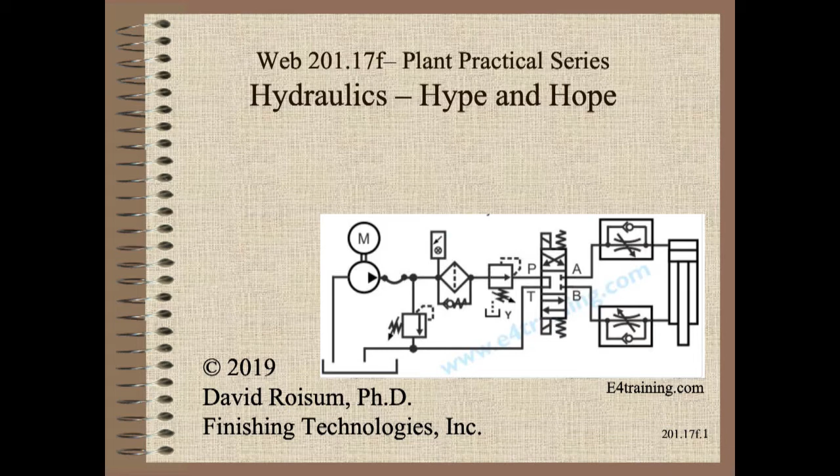While hydraulics are not for everybody, they do have many advantages over pneumatics. Even if you do not use hydraulics, you will learn useful best practices that apply to both fluid control methods in this short clip.

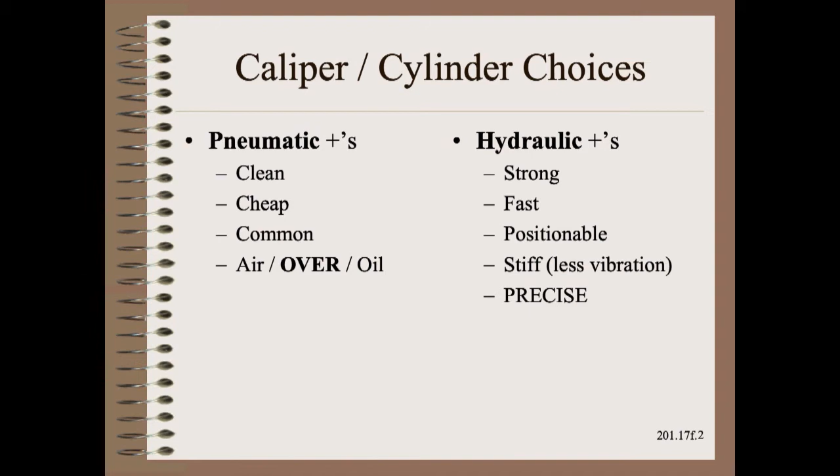Pneumatics are clean and cheap, and for those reasons more common. Yet, hydraulics offers many advantages. They are strong, fast, positionable, stiff, and most important for web handling, precise.

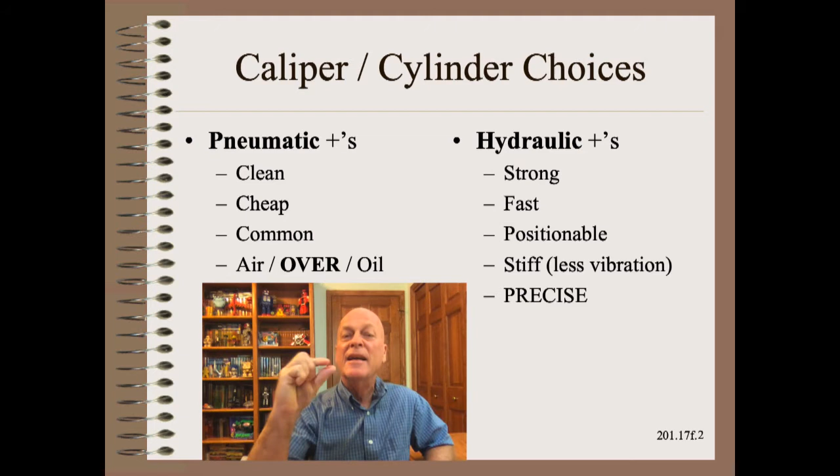What many people do not know, however, is that you can get some of these benefits by going air over oil. This is a simple rebuild that preserves the simplicity and investment in your pneumatic piping, yet can provide the muscle and vibration reduction of hydraulics.

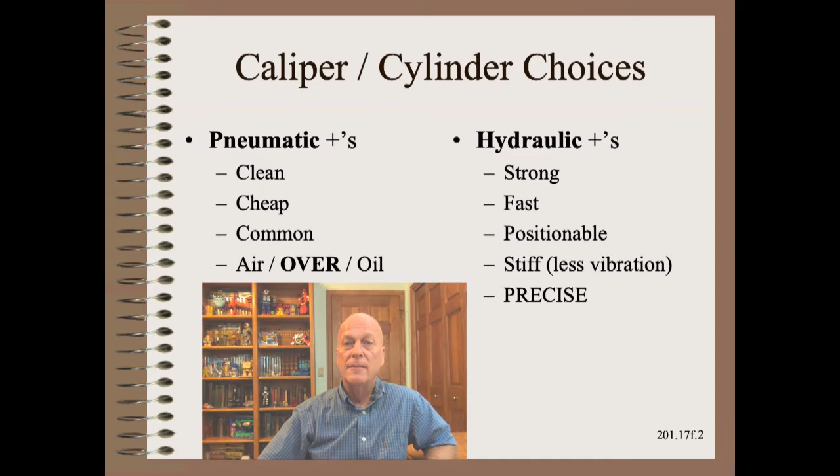Question: what is the definition of a seal? Answer: a place for leaks. This is one objection many people have to hydraulics, because leaks are messy. However, what a lot of people don't know is that air leaks are expensive.

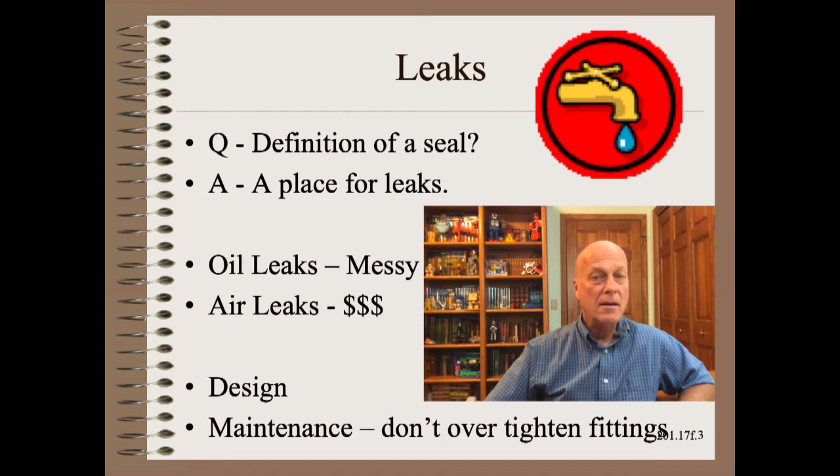Very expensive. The cost of air compressors in many plants are usually second only to the cost of heating it in the winter, and usually more expensive than other utilities such as electricity. Seriously, leaks happen because you, the designer, or you, maintenance, let them happen. There are leak-free fittings and there are leak-free maintenance practices. Most particularly is to not over-tighten fittings.

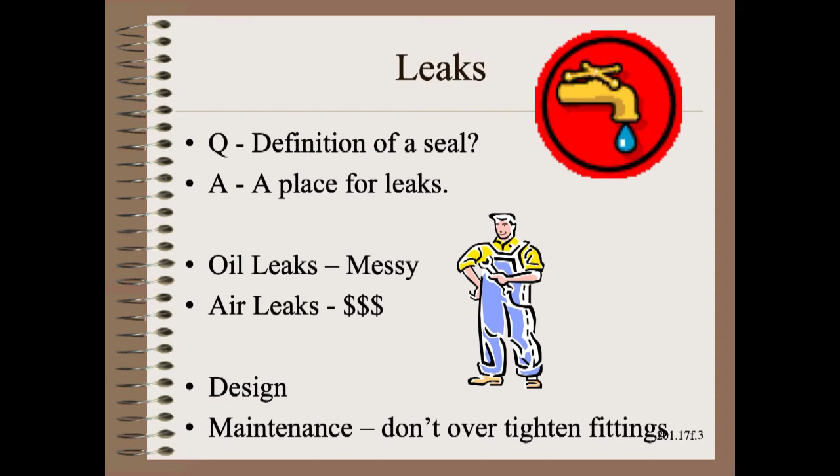Thus, the two sources of control aspects of variability are both improved. Pressure regulator resolution is proportionally better. Seal friction is reduced.

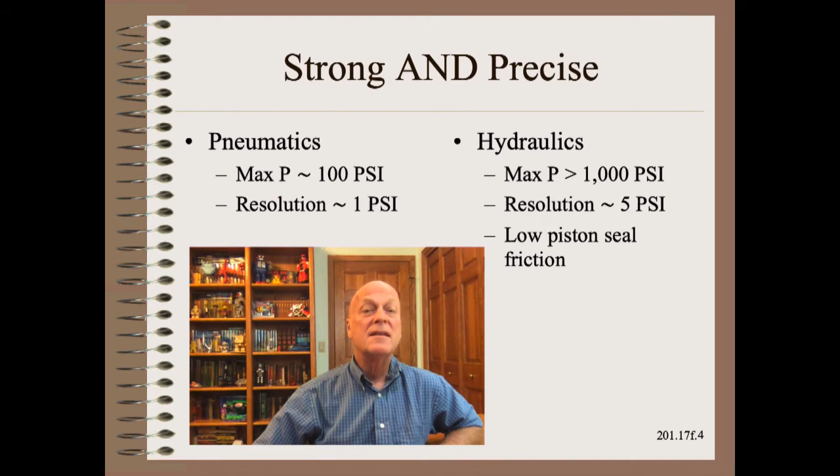As we stated in the last clip, you can't position pneumatics mid-stroke with any sort of precision or repeatability. However, you can position hydraulics quite precisely, to the thickness of a human hair, if they are equipped with a precision stroke sensor, such as a Temposonics probe, and if the assembly is stiff.

If so, you may not need to always externally tie the two ends of a system, and that greatly reduces mechanical complexity and, most important for control quality, friction. However, if you do this, you will need to have a redundant shutdown sensor to monitor the two sides in case of a sensor failure.

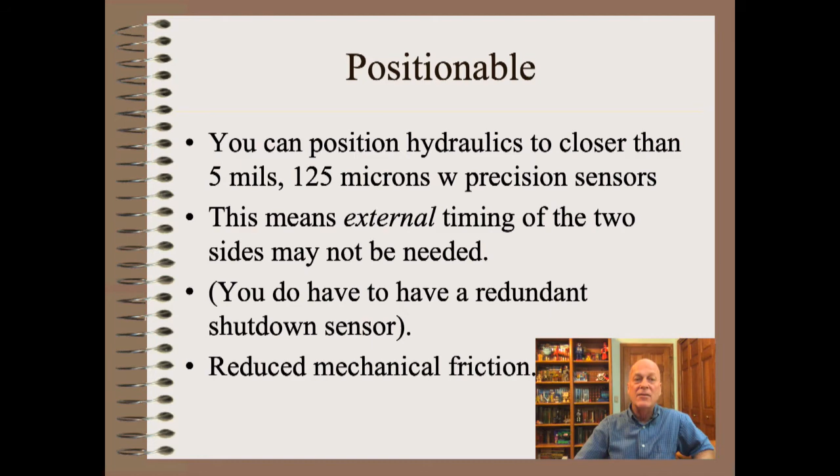There is one situation where hydraulics are very helpful. That is, the vibration that sometimes occurs on winders running bouncy grades. This subject is far too deep to cover here, and I've written and taught on this elsewhere. To make a long story short, one of the most universally helpful vibration treatments is to go from air to oil, or air over oil.

The mechanism is not hydraulic damping or dampening or shock absorbing as some think. Rather, it is that hydraulics are 1,000,000 times as stiff as pneumatics.

It is also possible to do active vibration reduction by feeding back high-speed pressure waves 180 degrees out of phase with the measured vibration. This is possible because some makes and models of controllers have better than 1 millisecond response. This has been researched and reported on in the literature several times, and I've personally seen a winder thus equipped.

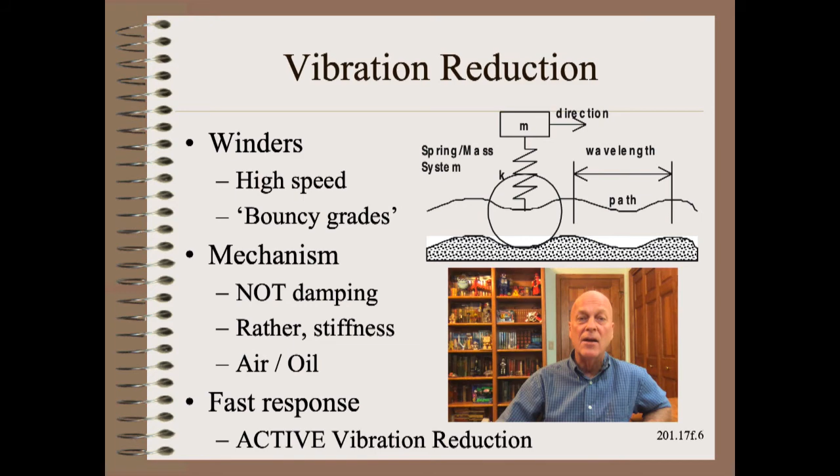You can take entire short courses on hydraulics, such as provided by e4training.com. So I will just offer a few of my favorite best practices here.

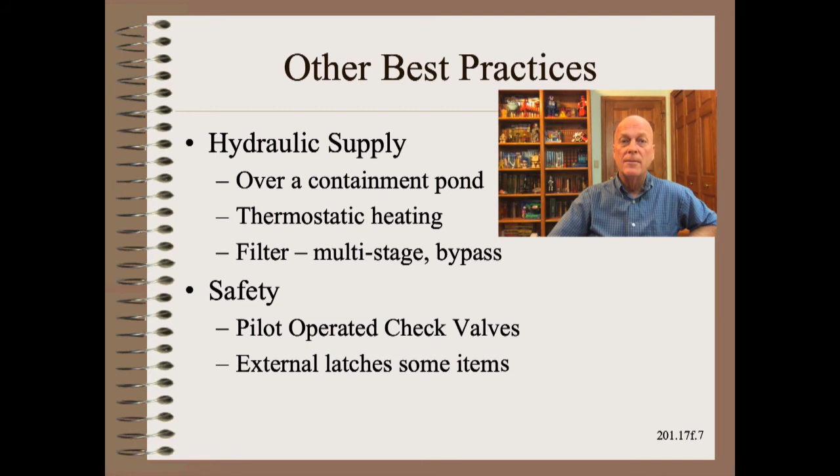Let me finish with a couple of common myths that I've run into scores of times. That is, the belief that fixing a piston seal will somehow fix a loading problem. While I'm obviously not going to try and discourage fixing leaks or anything that is broken, it will almost never affect load quality until the regulator flow is maxed out.

What will affect load quality is friction from a variety of sources, as we discussed in great detail in Web 201.16a and Web 201.17a. Another myth is that hydraulic regulators are always more precise, as we discussed in the first part of this clip.

However, like any instrument quality device, regulators or I2Ps and servo valves can get bound up with contamination and thus have poor response and poor repeatability.